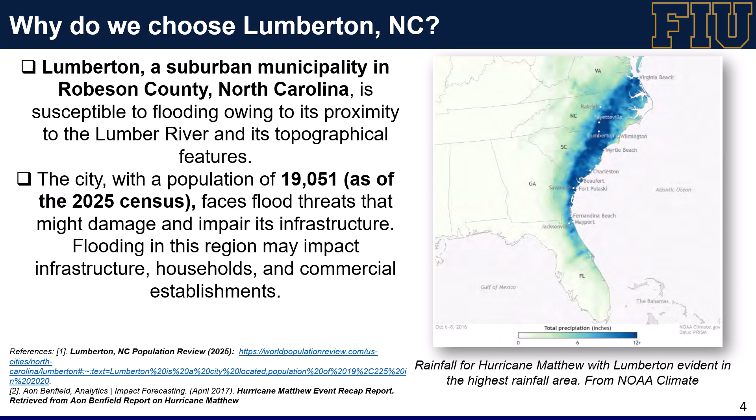Nearly 110,000 structures were damaged or destroyed, and FEMA reports that 71,000 households sought assistance with damages in nearly 79,000, totaling at least 777 million US dollars, including over 402.5 million US dollars uninsured loss.

So the hardest hit areas included counties like Robeson and cities such as Lumberton. Approximately 3,744 people evacuated to 109 shelters, and transportation was heavily impacted, with 635 roads closed, including major highways like I-40 west and I-95 north or south. Over 714,000 households lost power, mainly due to downed trees and damaged transformers.

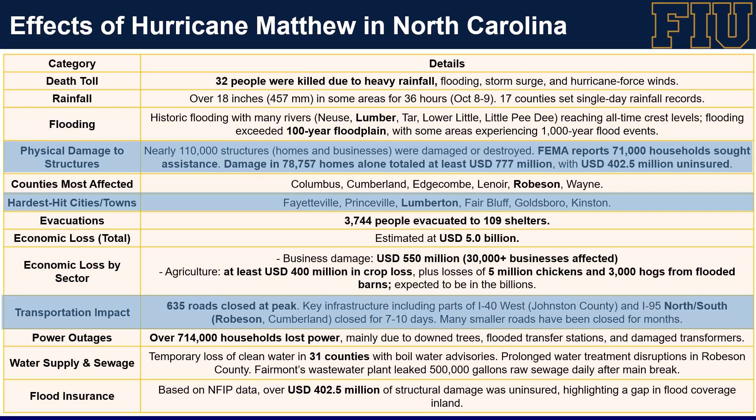The slide illustrates the comprehensive framework we use for flooding damage analysis. So the workflow starts with the data preparation, where hazard maps, building archetypes, cost ratios, and shapefiles are loaded and processed. This includes extracting building characteristics and flood depths to prepare the spatial datasets.

Next, the fragility and loss curves are calculated and visualized for different building groups using a statistical model like the lognormal distribution. Damage state mapping assigns damage probabilities to each building type, which enables the estimation of losses by groups.

The loss analysis section generates the detailed statistics and 3D visualization of damage probabilities and financial impacts. And the final steps involve creating clear visual outputs such as bar charts and shapefile exports for spatial analysis.

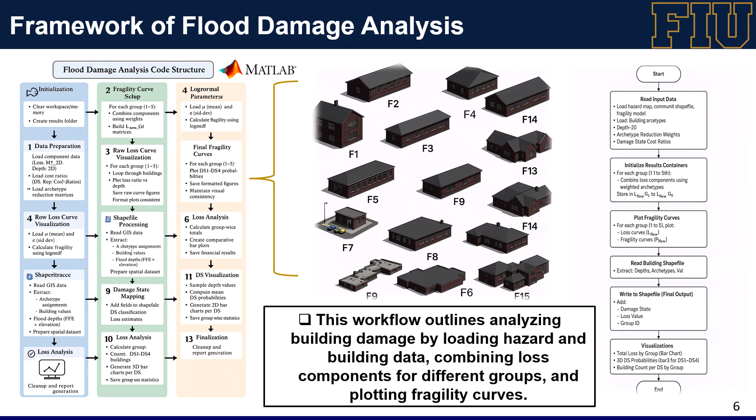Now, as we go through the methodology, we followed the flood risk and damage assessment in Lumberton, North Carolina. First, we collected the hazard data, building archetype information, and flood depth maps from various reliable sources. We then applied the fragility curves to estimate the probability of different damage states for each building type based on the flood depth.

Next, we combine these damage probabilities with loss ratios to calculate the expected financial loss for each building group, and we use spatial analysis to map damage distribution and generate loss estimates across the study area. And finally, the results were visualized through charts and maps to support interpretation and decision making.

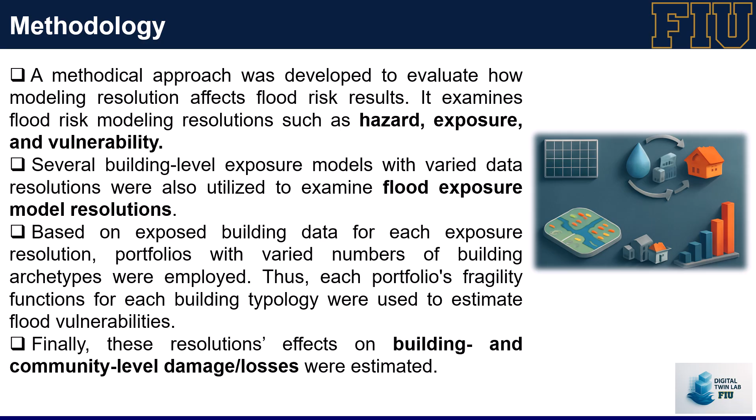So from this spatial distribution and mapped community that we did in ArcGIS, we can observe that the darker portion of the area has been flooded and the buildings were under the flood. And the buildings near the flood zone areas are shown in different colors, and the lighter color shows there are fewer flood zones, which is indicated by the mark from darker to lighter. So the darker it is, the greater the depth of the flood in that certain zone area.

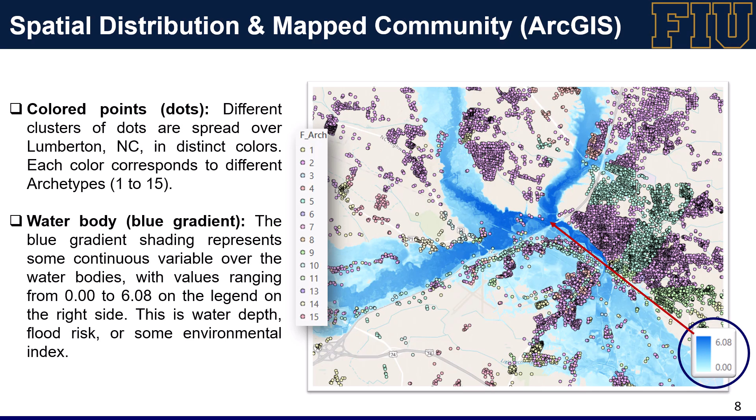This slide focuses on the diversity of building archetypes, essentially different types of buildings we considered in our flood damage analysis, and how these are grouped into what we call loss groups 1 and 2. Building archetypes are representative models of common building types found in the study area.

So the reason we group them is that analyzing every single building individually would be too complex and computationally expensive. So we group similar building types into categories called loss groups. Each group shares similar vulnerability and expected flood damage behavior.

So the table shows how different building types, represented by archetype indexes, are grouped based on their vulnerability and loss potential. And the importance behind this is that different building types react differently to flood waters. For instance, a small wooden house, which is considered an F1 archetype, will suffer different damage than a brick commercial building, which is archetype F8. So by grouping different buildings with similar damage profiles, we can calculate expected flood losses more accurately and efficiently.

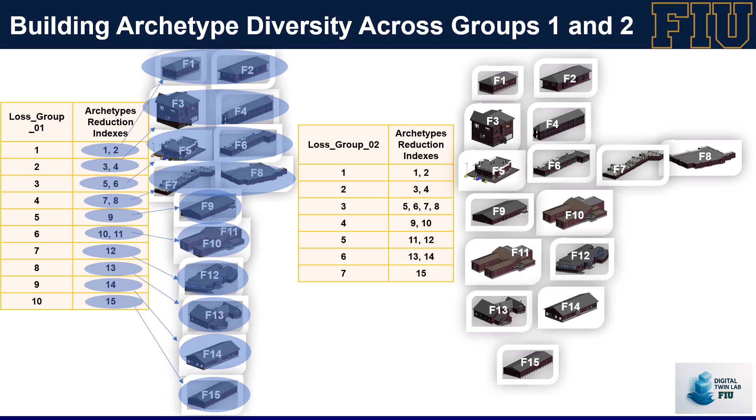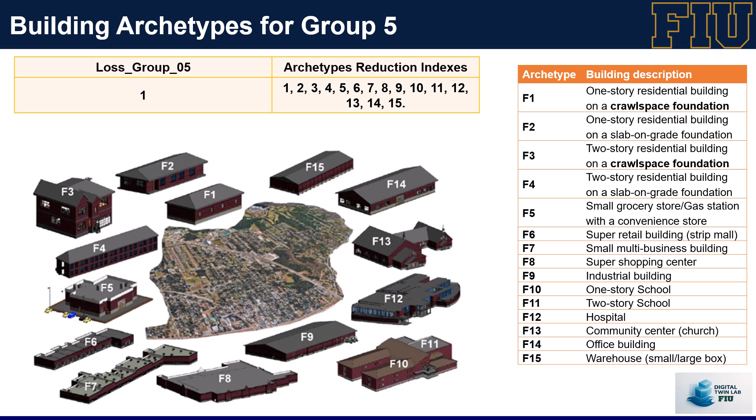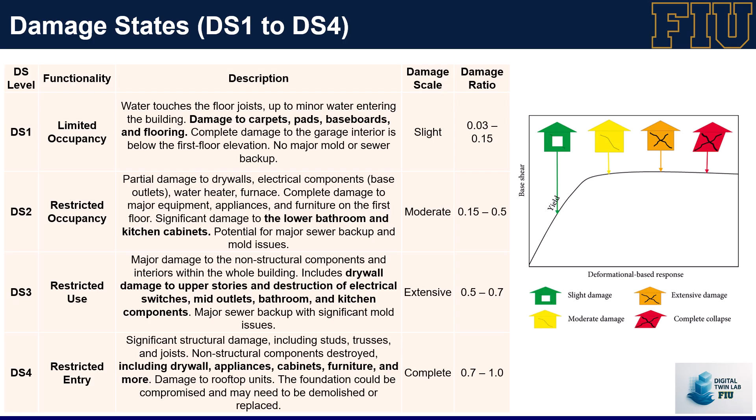This slide shows the different building archetype models in group 3 and group 4, and this shows the building archetypes for group 5. As we discussed about the damage state, we can identify that there are 4 different damage states: damage state 1, damage state 2, damage state 3, and damage state 4. Damage state 1 is considered slight damage, damage state 2 is considered moderate, damage state 3 is extensive, and damage state 4 is complete damage occurring to a certain area and certain prone zones of the buildings.

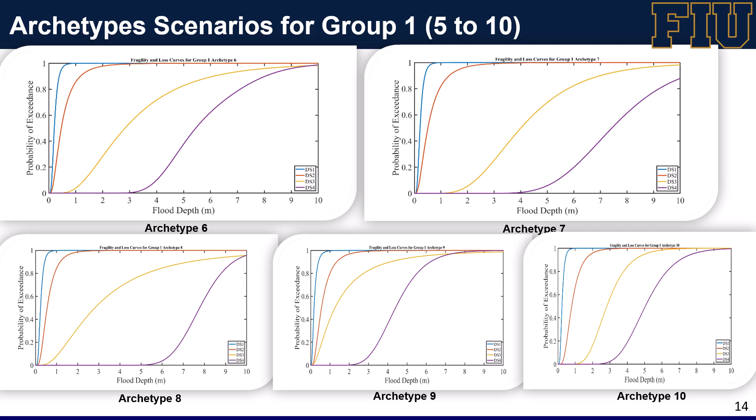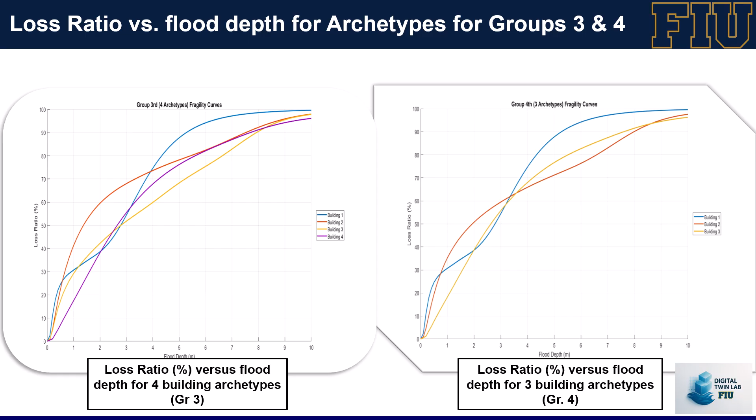The probability of exceedance and flood depth has been shown on the left side of the figure, in which the cyan color represents damage state 1 and the red color represents damage state 4. On the right side of the figure we can see the different blue dots which represent the random loss samples, while the black line shows the average loss estimates from method 1. So we use the different hazard loss curves to identify the building damage analysis.

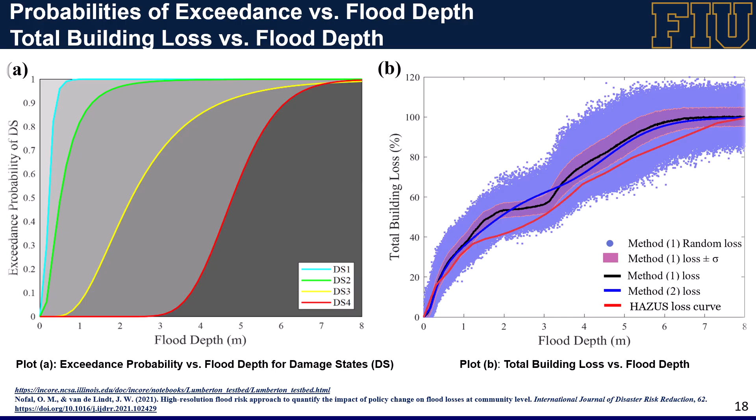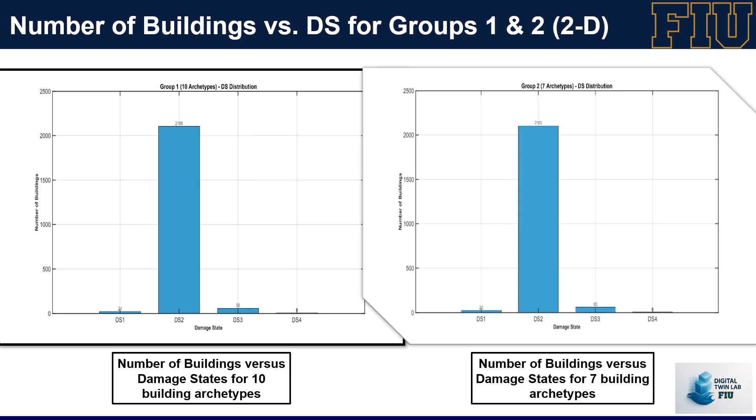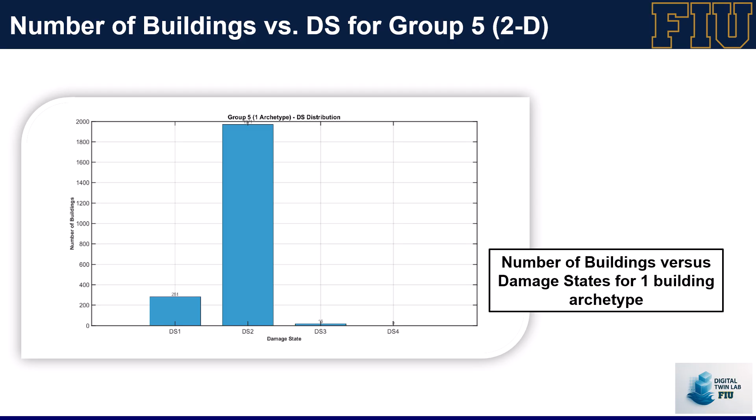In this slide we can observe the number of buildings versus the damage state for group 1 and group 2 in 2D. As we can see, damage state 2 has been higher in group 1, group 2, group 3 and group 4. In the case of group 5, one interesting observation is that a relatively higher number of buildings show minor or no damage compared to other buildings. So this could be an area to explore further. Overall, this chart helps us understand how damage is distributed and can guide us in prioritizing mitigation efforts for buildings that are more vulnerable.

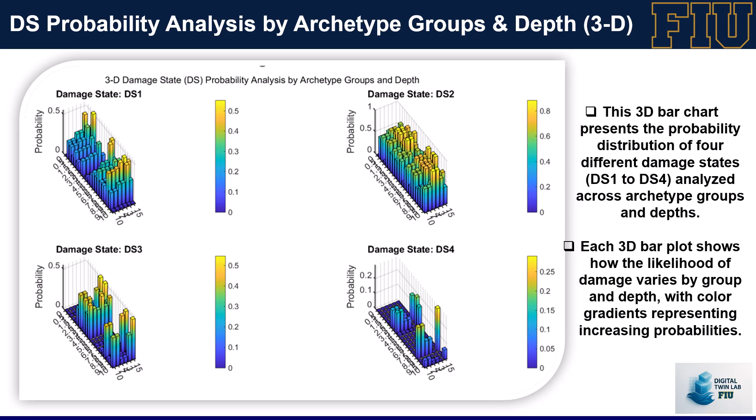This is the 3D probability analysis of archetypes of groups and depths. As we can observe, the y-axis shows the probability, the x-axis shows the different archetypes, and the z-axis shows the different depths of the buildings based on damage states 1, 2, 3 and 4. In these 3D graphs, the same thing: here the x-axis shows the damage state, the y-axis shows the building groups, and the z-axis shows the number of buildings.

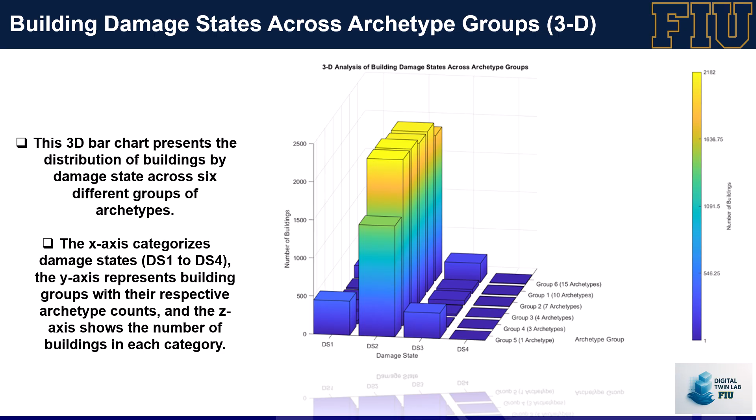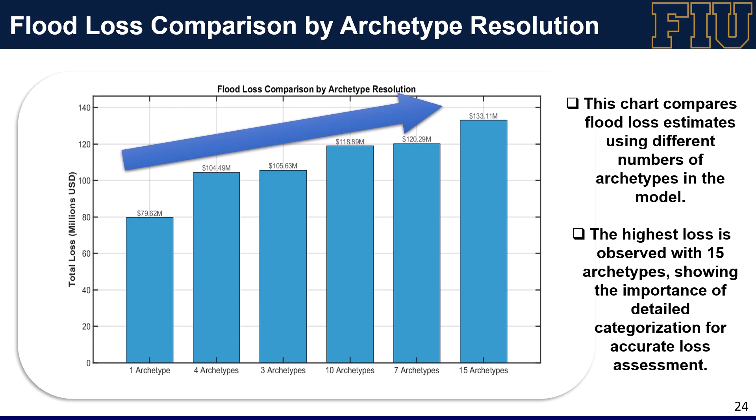So we can conclude that the resolution of archetype modeling dramatically shapes our flood loss estimates, and the simplistic models with fewer archetypes tend to underestimate the true risk, potentially leaving communities vulnerable. Understanding these nuances is critical for planners, engineers and policymakers who rely on accurate risk assessment to protect lives and property. So why does this matter? It matters because better model resolution means better preparedness. It allows us to identify the vulnerable building types and more precisely tailor flood mitigation efforts accordingly. With precise damage state probabilities and loss estimates, resources can be targeted efficiently, whether in flood defenses, insurance schemes, or emergency response planning.